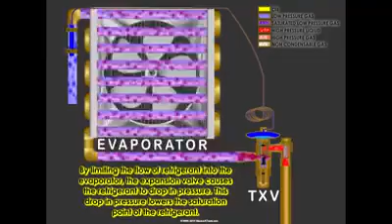Managing the flow of refrigerant is essential to maximize the efficiency of the evaporator while limiting any excess liquid refrigerant from returning to the compressor.

The thermostatic expansion valve should be located as close to the inlet of the evaporator as possible on the high side of the system. There are a few components and concepts of the expansion valve that you should be familiar with in order to understand how the expansion valve works.

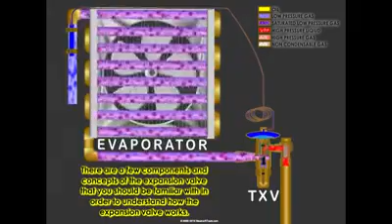We'll start by identifying the refrigerant-filled sensing bulb, which is connected to the top of the power head with a capillary tube. Next we have the diaphragm. The diaphragm separates the pressure of the sensing bulb in the top of the power head from the pressure of the evaporator on the bottom side of the diaphragm. Finally, there is an adjustable pressure spring on the bottom side of the diaphragm.

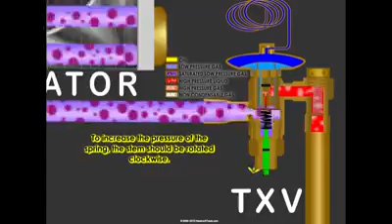To increase the pressure of the spring, the stem should be rotated clockwise. To decrease the pressure of the spring, the stem should be rotated counterclockwise.

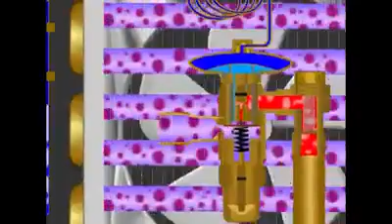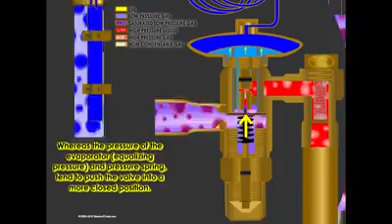The pressure of the sensing bulb on the top side of the diaphragm tends to push the valve to a more open position, whereas the pressure of the evaporator, or equalizing pressure, and pressure spring tend to push the valve into a more closed position. In order for the valve to feed in a normally operating system, the pressure of the sensing bulb on the top side of the diaphragm must be greater or equal to the equalizing pressure and the pressure of the spring.

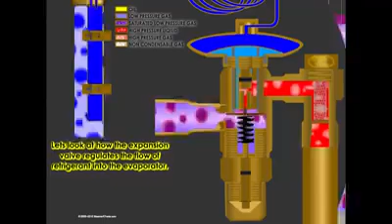Let's look at how the expansion valve regulates the flow of refrigerant into the evaporator. As we've already seen, the expansion valve is equipped with a sensing bulb filled with refrigerant, which should be located at the outlet of the evaporator. This bulb is connected with a cap tube to the power head of the expansion valve.

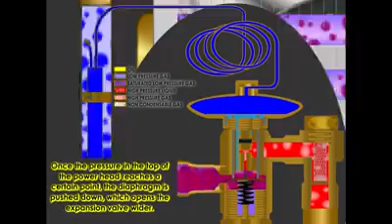As the temperature at the outlet of the evaporator rises, so does the pressure of the gas within the bulb and the top side of the diaphragm. Once the pressure in the top of the power head reaches a certain point, the diaphragm is pushed down, which opens the expansion valve wider. This allows more liquid refrigerant to be fed into the evaporator.

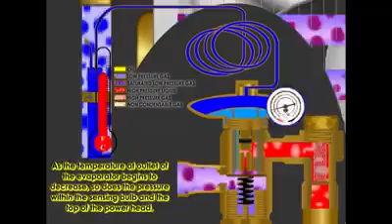As the temperature at the outlet of the evaporator begins to decrease, so does the pressure within the sensing bulb and the top of the power head. When the pressure above the diaphragm in the power head decreases to a certain point, the valve retracts and the flow of refrigerant is reduced.